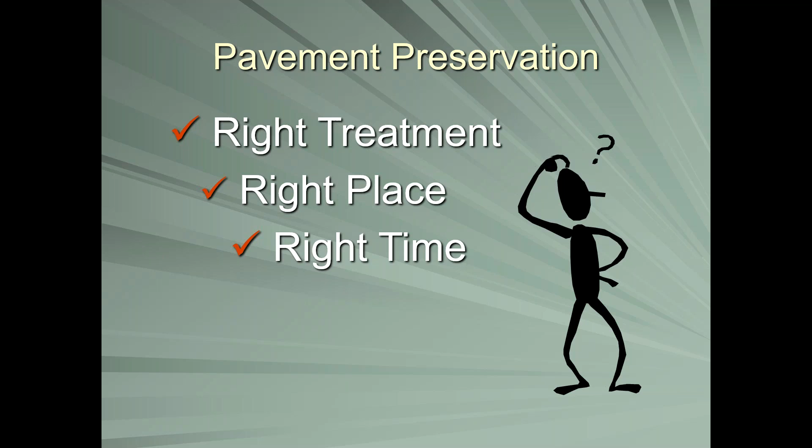Now the National Center for Pavement Preservation, out of Michigan State, likes to define pavement preservation as the right treatment in the right place at the right time. You could also use this definition for asset management, or for lots of things. And it's really true. It's not just about preserving the pavement with minor repairs—it's really all of the repairs we do, everything from doing nothing all the way down to total reconstruction.

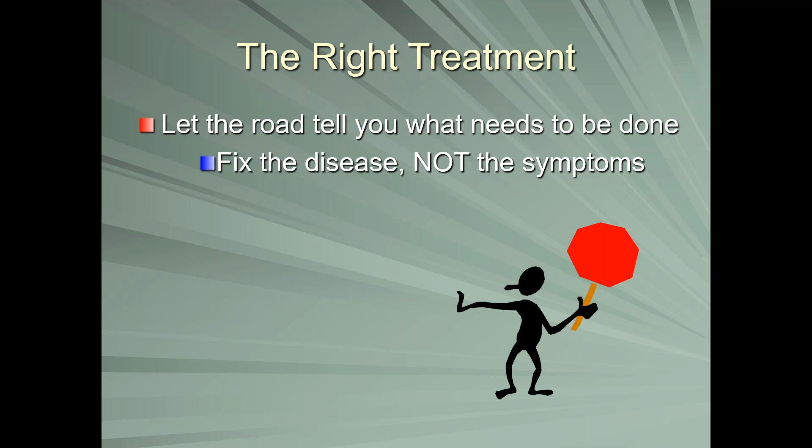The idea is to not just pick a repair because we can afford it or because it's expedient, but to choose the right treatment, to let the road tell you what needs to be done. Fix the disease, don't fix the symptoms, don't cover them up, because if you cover them up, they're going to come right back. For instance, here's a classic example of a roadway crack.

Looks like it's a load-induced crack, and if you went in there and tried to crack-repair it, it's not going to work. The crack is too wide, and you've got to figure out where the crack came from in the first place. Yes, it's in the wheel path, but if you look carefully, it's wandering, and it turns out they've tried to crack-repair it, and it doesn't last. This is actually a frost-heaving kind of crack. So we need to make sure we understand that and do the right repair. In this case, they need to fix the drainage on the upstream side. And we'll see if my pen works today.

Yep, they need to fix the drainage over here to keep the water from coming in from the side. Otherwise, they're going to have problems.

Here's another one. I got a phone call, went out to visit a town, and they were going to put an overlay on this road because they had a state grant to help pay for it. This is the highway garage right there. Much like in Ohio, where county highway officials are elected, here our town highway officials are elected, and that was an election year. That would have gone over really well when it failed in just a few months because of the drainage underneath. You can't just overlay this, it's too late.

So what we're going to do is have a little bit of fun, and do a pavement preservation quiz or game show, whatever you want to call it, and talk about different things in the list of repairs, focusing on the preservation side, but all of these things sort of overlap a little bit, as you'll see.

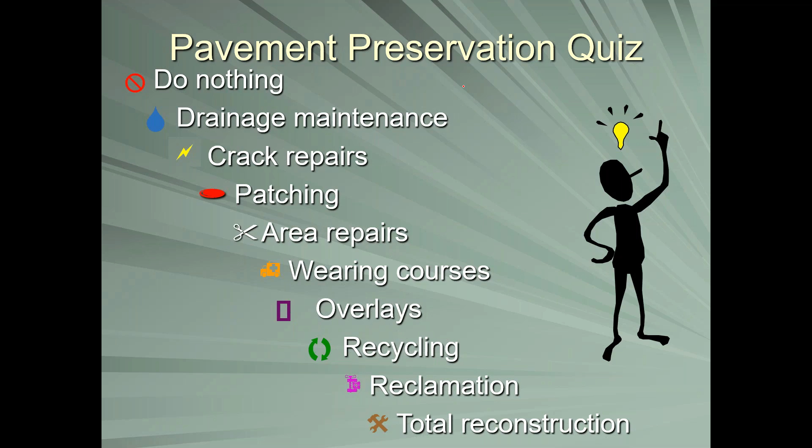If you're clicking 4 or more, I hope you're doing good social distancing. Or maybe you're at home with your dog, your 2 kids, and the parakeet, and you counted that as 4 or more. That's okay too. I hadn't thought about that. Somebody I saw was posting on Facebook their coworkers, and it was their 2 dogs.

Well, you got 88% there. So, can you see the results, David? I can actually. Good, most of you are by yourself. A few of you have 2 or 3, and then about 20% of you 4 or more. Again, please practice social distancing, we all want to be safe.

Okay, the next question that will help me quite a bit is who do you work for? So local government, state, a consulting or engineering firm, a contractor, or other. And of course, I'm always asking about people working for the weekend.

Okay, we got almost 90% there, Victoria. So over half of you work for a local government, that's good. A bunch work for the state, a few folks for consultants and contractors, and a few folks are working for the weekend, though I'm having a harder time figuring out which days of the weekend. But those are the days I don't wear a bow tie, I guess that's the way we can define it.

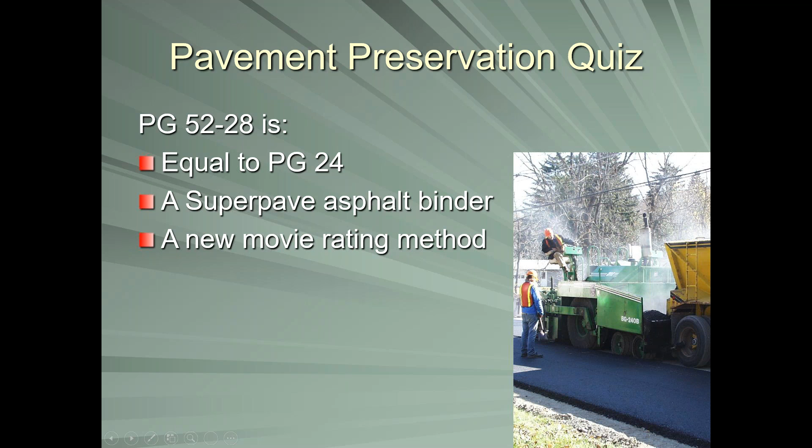Can you see the picture again, Victoria? Yes, perfect. So Superpave, as soon as my computer goes to the next screen, is the way we put asphalt together now. It's actually a whole method, not just the emulsion that holds it together and the binder, but the actual method of making the mix design up. And so SuperPave is what we use these days for that.

And PG graded binders are essentially performance graded. There's lots of big, long research papers on what all this SuperPave is, but essentially what they did is said, hey, what makes good asphalt mixes? We got these new polymers, let's blend the two together and come up with this new procedure called SuperPave. I like the description a guy who used to teach our asphalt paving class gave: he called it mighty good pave, and I think that's a pretty good way to think about it.

And it's based upon climate, because climate, we know, makes a big difference. You're going to certainly need to have an asphalt that can handle cold weather more in northern tier states than you would in southern tier states, but also traffic, because as traffic drives down the road, it heats it up. And you got to be careful it doesn't get too soft or bleed on you.

So the idea is, in the case of a PG 52-28, it's the range of temperatures. The 52 is the highest temperature in Celsius, not Fahrenheit, that the pavement temperature is expected to reach. Minus 28 would be the lowest pavement temperature is expected to reach. Now, yes, there's issues of how long that period is. We're talking about a full week for the 52 and just a short period of time for the minus 28.

What you need to know is what works in your area, so check with your own state specs and pick that out. And most of these mixes these days usually have letters at the end of it, P's and H's, for different kinds of additives or different characteristics they've been adding to it. Just like getting a 2-liter bottle, you don't need to necessarily know exactly what 2 liters is. You just need to understand what works in your particular area and make sure you understand and use the right material at the right time, okay?

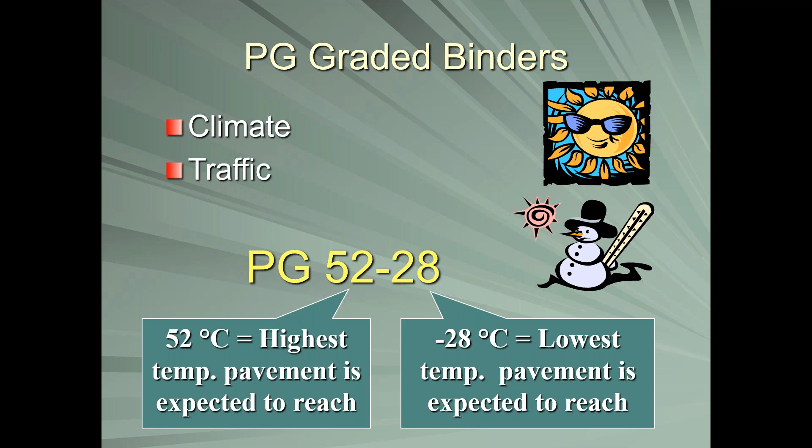Next question: the percentage of asphalt in asphalt concrete is 0 to 3%, 3 to 8%, or 8 to 12%. So if you bring up that poll, please.

I did notice on the last poll question that when I hit to hide the responses at the end, it looked like it went back to your screen. Oh, we'll try that. Be brave. Yeah, I'll watch for a second and I'll let you know. Okay, almost there, Victoria. We got our 80%. Okay, so 4% said 0 to 3, 68% said 3 to 8, and 28% said 8 to 12%. Okay, so I'll let you try hiding that. And? I shouldn't have said it because it didn't work. That's okay, sorry, no big deal. Life is about change, it's no big deal.

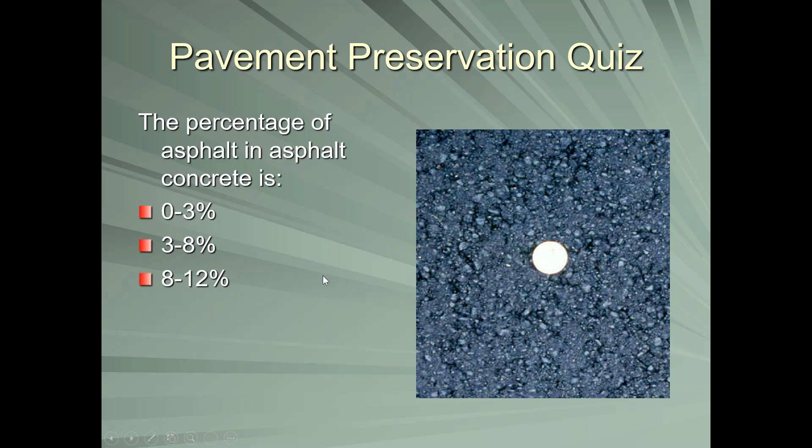Okay, so the answer actually is for almost all mixes. There are some exceptions, of course, but for most mixes, the actual answer is 3 to 8%. It's not that much binder. If you have too much binder, you're actually going to have a problem, it's going to be almost too soft, okay? And that can actually be a problem if you put too much asphalt into the mix. It actually doesn't take that much.

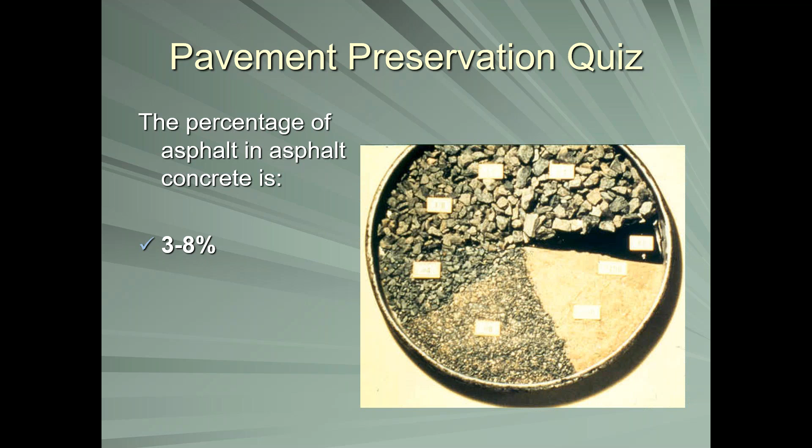Are there some mixes a little bit higher? There's some rare mixes, but most mixes we want to keep it relatively low. Whether it's cold mix or a hot mix or the more modern warm mix, the amount of asphalt is actually less than most people think, okay? Remember, you're not driving on asphalt, you're driving on rocks. It's the rocks that actually do the work. The binder is just there to hold everything together, okay?

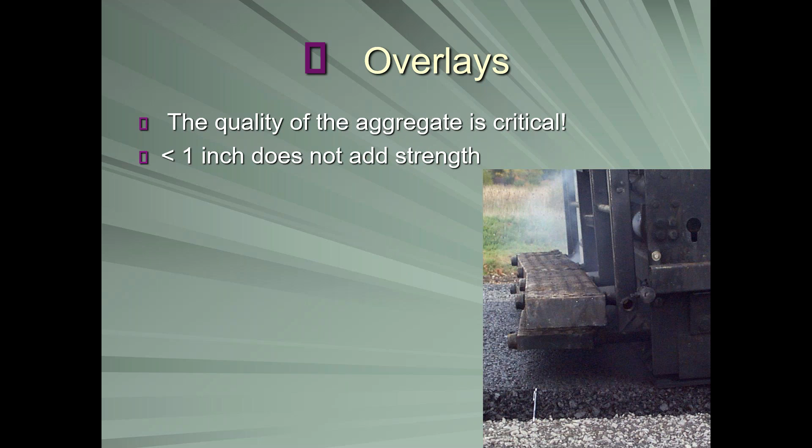So keep that in mind when you're thinking about an overlay, okay? The quality of the aggregate is critical, in fact it's the single most important thing. And if you're not putting enough thickness down, you're not really gaining much strength. So if you're just putting down a thin overlay, you're just doing a wearing course or a chip seal equivalent. You really need an inch or more, and I prefer 1.5 inches or 2 inches to really add structural strength, okay? So keep that in mind when you're thinking about your choices for repairs.

Okay, next question: recycling fixes the base. It's just a simple true or false. Recycling fixes the base. And here comes the poll. True or false?

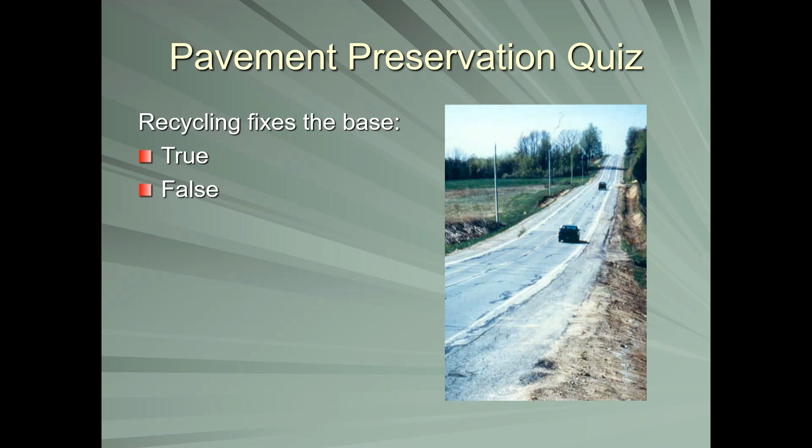Okay, they're seeing the results. 90% of you said it does not fix the base. So try hiding it and we'll see what happens, Victoria. Nope, nope. We jinxed ourselves, it's no big deal. So the answer is, as you got right, it doesn't really fix the base.

When you see the term recycling, what we're really doing is addressing a relatively thin amount of material, usually the asphalt layer, sometimes not even the entire asphalt layer on a main line roadway that's got a lot of asphalt thickness. We're only talking 6 to 8 inches at the upper end, so we're really not doing a lot with most recycling operations.

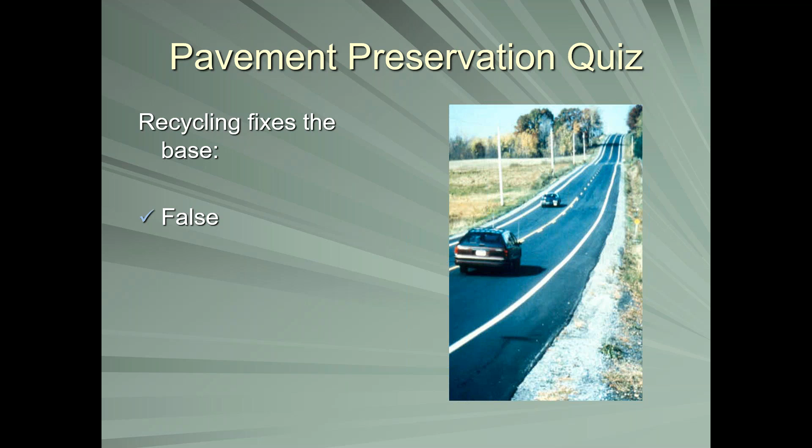If we want to do something more extensive, we have to go to stabilization, like full depth reclamation with different additives, and we'll talk more about that with another question. But just keep in mind, when you hear the term recycling, we're really talking about fixing the surface. And if there's drainage problems underneath, or a base problem, it's still going to be an issue.

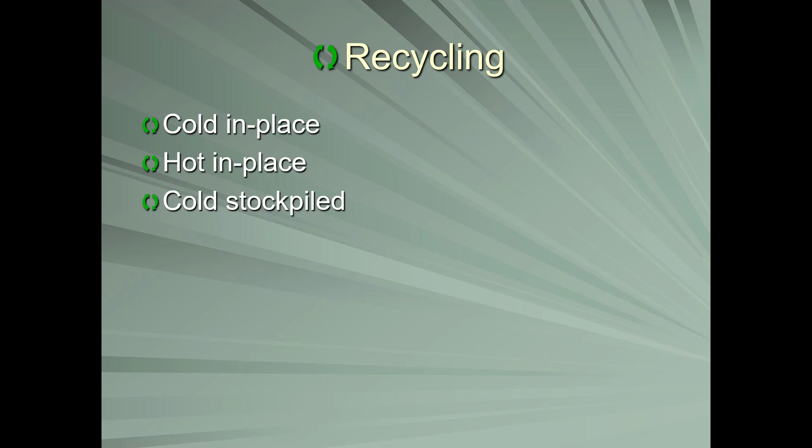The key with that technique is you've got to go slow. People want to go fast, but you can only put so much heat into the asphalt to soften it enough to scarify and roll it. If the smoke coming off is anything but a light gray, i.e. blue, you're burning the asphalt and damaging the pavement more than you'd want, and you're going to have to add back material. The whole point of recycling is to not have to add back in too much material.

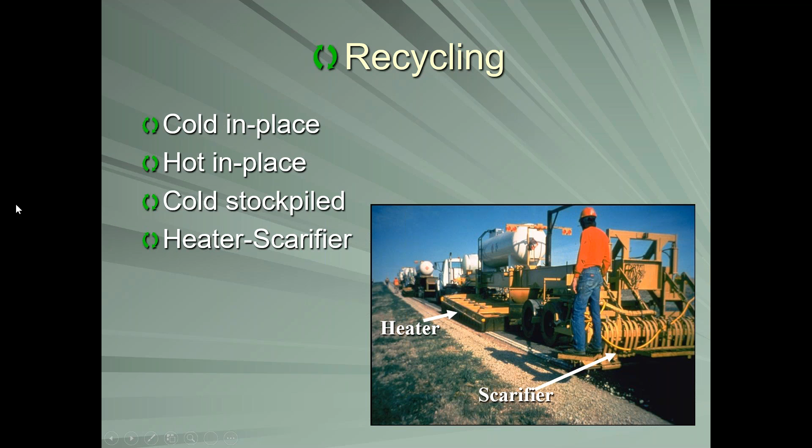Okay, next question. Pavement preservation time. Doing nothing is a good maintenance technique. True or false?

Okay, almost everybody says doing nothing is a bad maintenance technique. Let's try hiding it. Of course, it's probably going to have to redo the screen, isn't it? Yep.

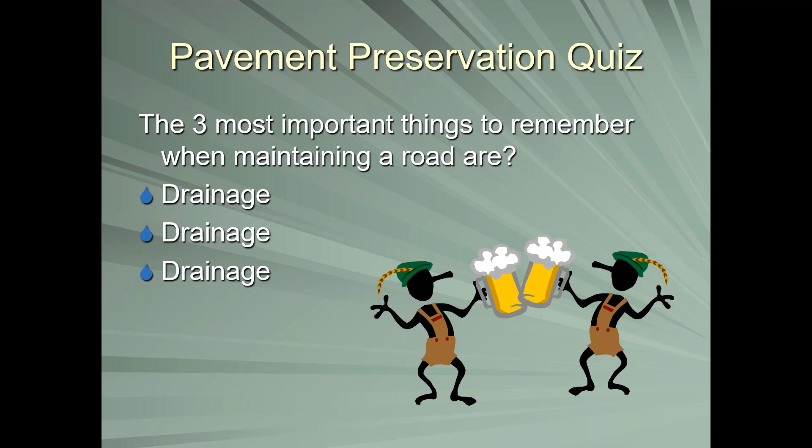People got it. Drainage, drainage, and drainage. If you take care of the drainage, most of your problems go away. In fact, almost all the premature failures we get are because we didn't handle the drainage. A lot of times when we talk to the public and elected officials, they think poor drainage means a culvert that's too small. But drainage, if you think about it, includes crack repairs, poor bases, everything in our roadway. We've got to have good drainage, and I'll show you more examples as we play with the quiz. But the single most important thing is drainage by far, so keep that in mind.

Okay, calcium chloride stabilization. I said I'd talk to you a little more about stabilization. So calcium chloride stabilization reduces the fines percentage in the base we're stabilizing, reduces the frost susceptibility of that base material, or reduces both the fines content percentage and the frost susceptibility.

So we'll do a poll and see what y'all think. I had to combine your last option because it was too long for the polling software. Okay, no problem. So if you don't remember, 'reducing both of the above' is an option. And we're not tracking your answers, so just vote your gut.

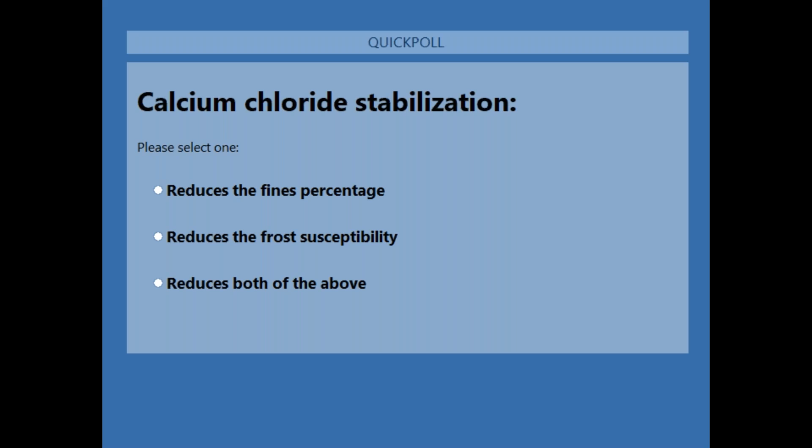Okay, so two-thirds of you say it reduces both. About a third say it reduces the frost susceptibility, and a few say it reduces the fines percentage. After you hide that, I'll flip the screen on and off real quick. You're good to go.

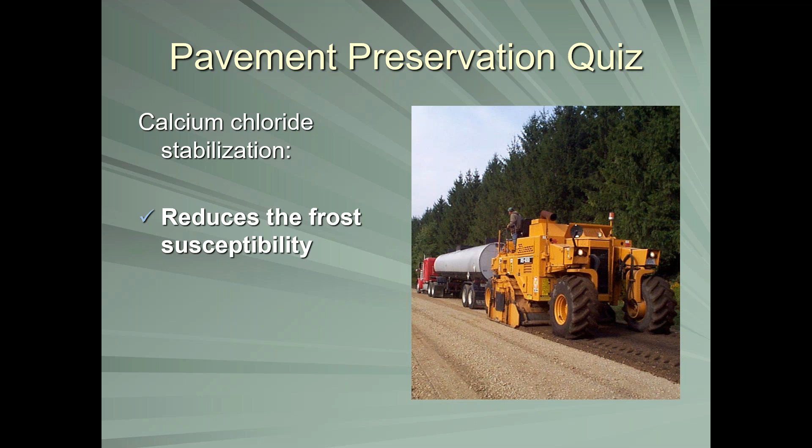So the answer is it reduces the frost susceptibility. It does not change the fines content. It's a salt. Now there are times when you'll see people say, well, we don't use salt—I've seen that advertised, especially in some western states. We don't use salt in the winter, we use calcium or magnesium chloride. Got a trick for you: they're still salts. If we're doing stabilization, there are actually lots of different ways we can do it.

We can use asphalt as well in stabilization, but the two I want to talk about right now are mechanical and chemical. Mechanical stabilization is a fancy term for either over-densifying or bringing in aggregate to reduce the fines by blending clean material with dirty material, so the average has less fines in it. Remember, if we reduce the fines, we have better quality for drainage.

Chemical stabilization can include calcium, asphalt, lime, fly ash, and cement, but they all do slightly different things. The asphalt emulsion doesn't lock everything together—it just takes some of the fines and binds them up so they aren't affected by water. Lime, fly ash, and cement can actually cement things together if you have the right chemical makeup. But if you add too much, you can have a problem with cracking, especially shrinkage.

And then finally the salts—calcium, magnesium, and in some cases sodium chloride—are used to chemically stabilize. What they're really doing is reducing the frost susceptibility, much like when you make ice cream, you lower the freezing point, reducing the negative effects during freezing and thawing. You don't eliminate it, and you still have a high fines content, but keep in mind they have different purposes for different operations. Do me a favor: when you calculate what you need, don't add extra. People want to do that—'if 5% is good, 8% would be better.' If you add too much, you can create problems: making it soft, making it crack, and having negative effects from having too much.

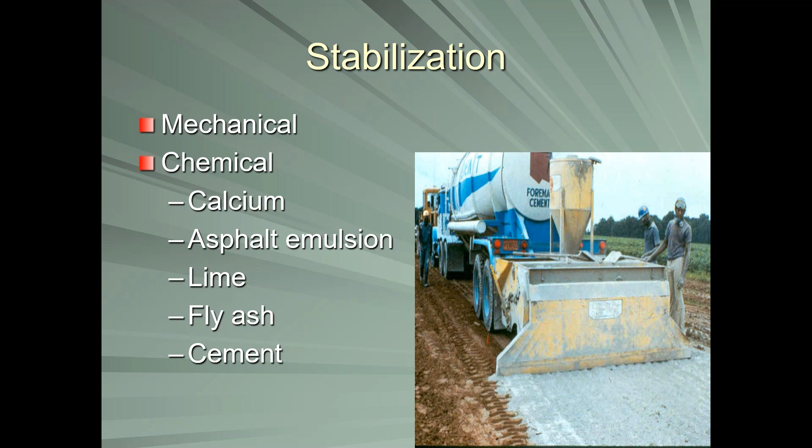So we'll do a poll. I think this one should be easy after the last two, Victoria. I would hope. Someone has a sense of humor. Well, it's got to have a little bit of fun—we can't be totally serious.

Okay, almost to 80%. Okay, so we're going to show the results. Yeah, you're right, that's a pretty easy one. Only a couple of you decided it wasn't the supervisor and OSHA inspector. Okay, go ahead and hide that, Victoria.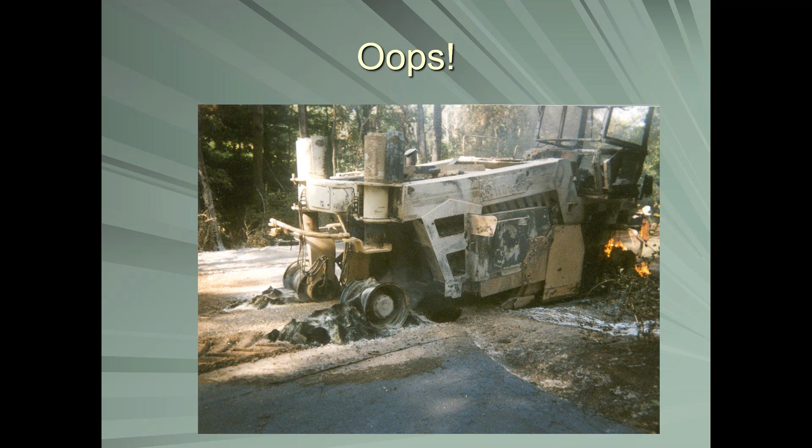Next question: sealing is used for cracks that are non-working. True or false? You can bring that one up.

Mailbox post, by the way, yes, you should call for mailbox post.

Okay, sealing is just used... it's fascinating to see all the answers from people all around the country. That's why we like doing it. I like these multi-state ones. It's sort of fun to see.

Only if you break the plane for the last one. You don't mow the road surface. Yeah, it's always an interesting question: when should you call?

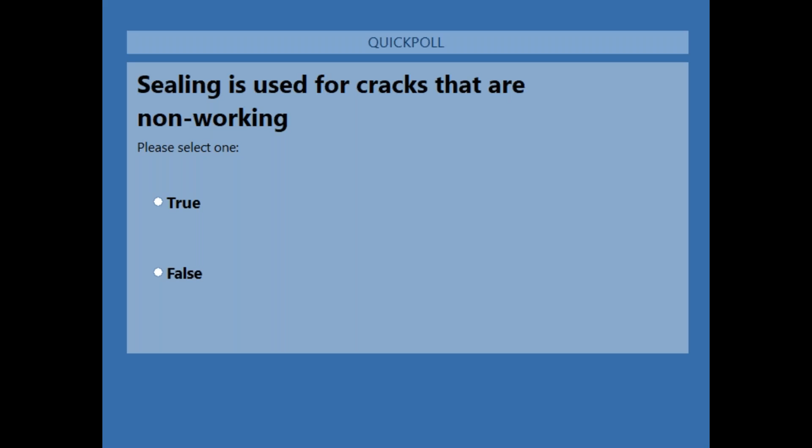Okay, so let's go back and we'll see if it keeps me going here. You're going to hide it? It didn't work this time. Oh my goodness, I just have to laugh. Chuckle at technology, yeah, you do. It's okay.

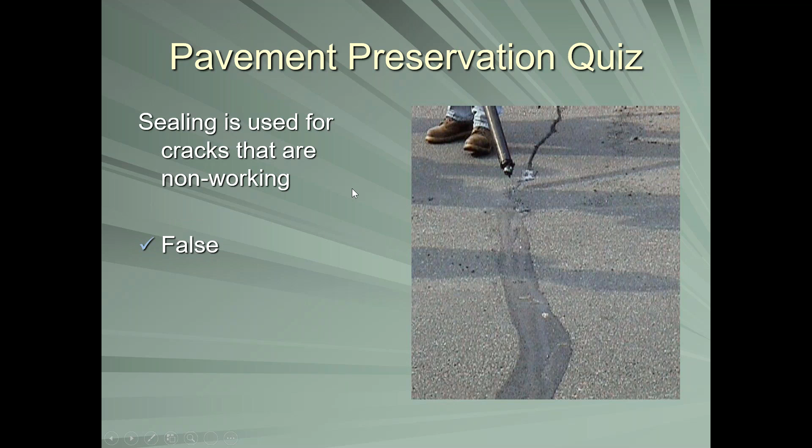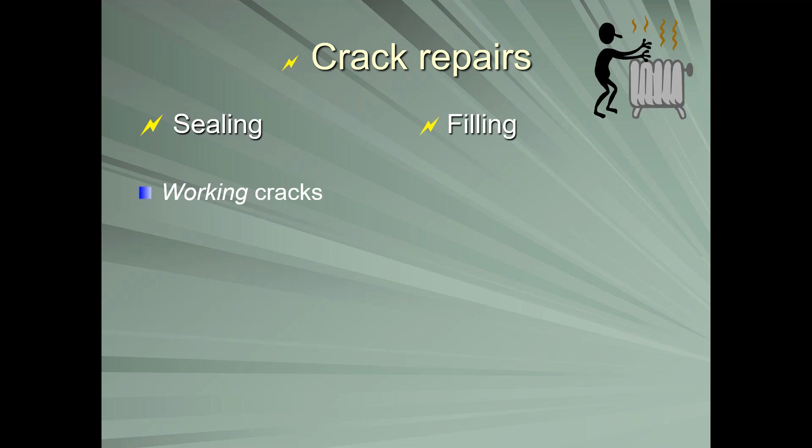So the answer is false. Now, I actually lumped together all crack repairs. There's two types of crack repairs: they fall in the category of sealing or they fall in the category of filling. A sealing of a crack is for working cracks, cracks that are moving, usually thermally. You need to seal them because you're trying to prevent the intrusion of water and debris into the crack. Because if it's a moving crack and you don't seal it, when it gets filled up, as it moves it's going to actually compress and do more damage.

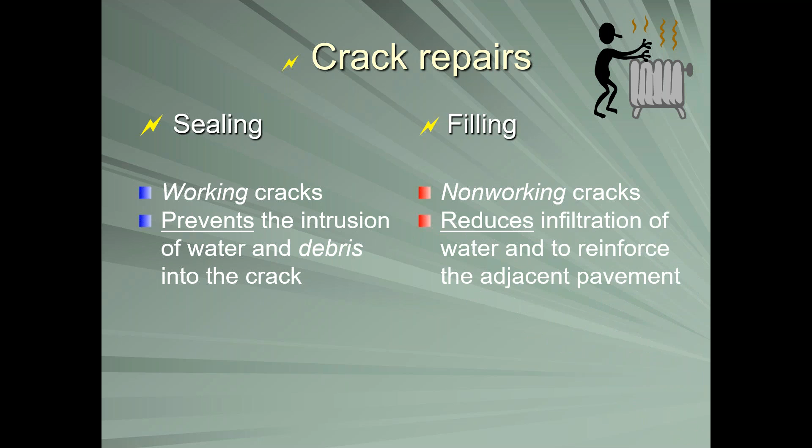With filling, that would be only used for non-working cracks because you're not actually going to seal everything. You're just going to reduce the infiltration of water and try to reinforce a little bit the edge of the pavement. And there's tons of techniques out there available to you, from flush filling to overband to reservoirs. But again, if it's a moving crack, it's worth it to spend the extra money on the more expensive sealing materials, the rubberized materials, the elastomeric kind of materials, versus if it's just a crack that's cracked because of age, you could fill it with an asphalt emulsion and it would be fine.

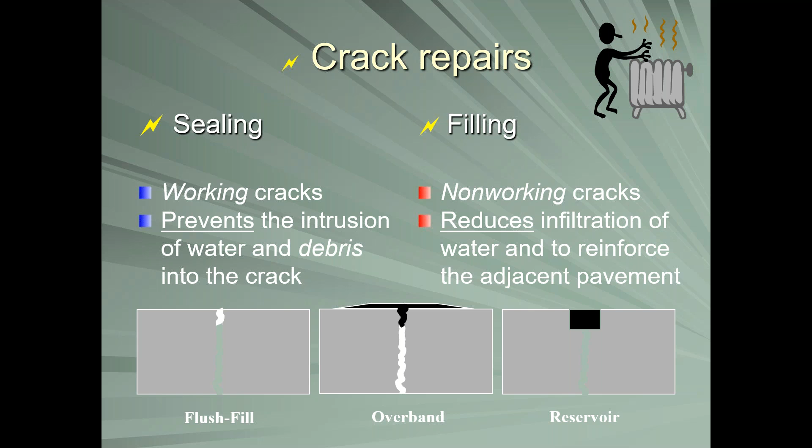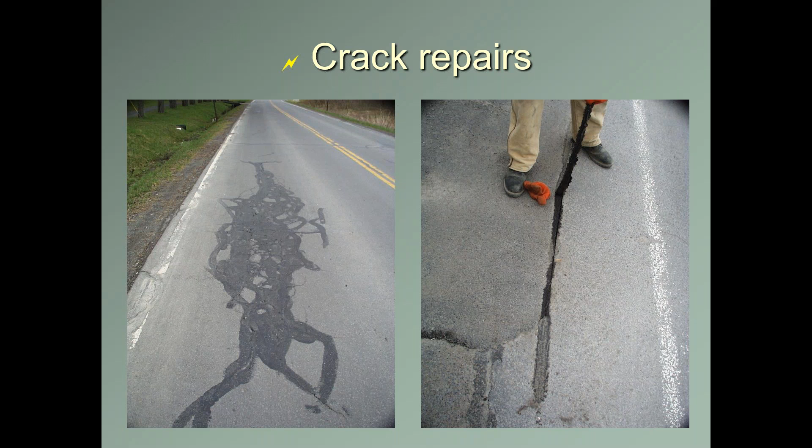If you're going to do a router, are you going to do any sealing? Make sure you clean the crack. I actually prefer a heat lance to really get it nice and dry. So that's very important to keep in mind.

So pick good candidates. Remember earlier I said doing nothing is a good repair choice? It would be a lot better repair choice here to do nothing than to waste the money on this kind of crack repair. If you're paying somebody by the gallon, however, and you don't have good inspection, this is what you might get.

Next question: the most cost-effective patching technique is throw and go, throw and roll, semi-permanent, or spray patch. Okay, you can bring that up.

And you have a comment in the question box. Let's get this poll question done, and then I'll go back to the comment.

I like the split on this question, the answers we're getting. Well, that's okay.

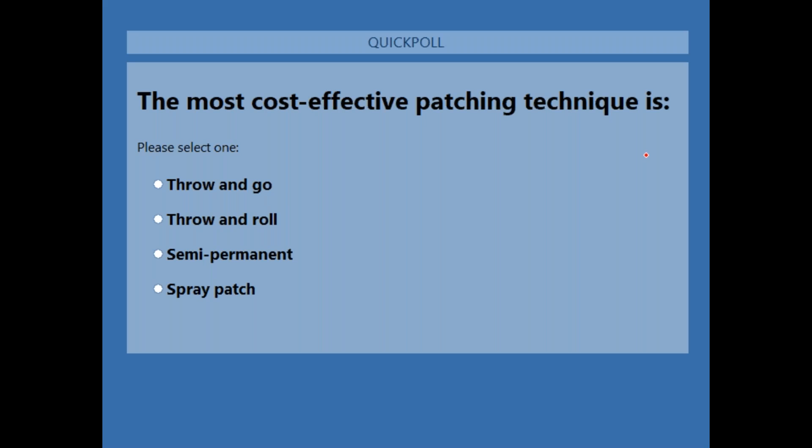Okay, so the answer is, what do you think? Well, good news is for all of you except for one choice, you've been right. It depends on the situation, as the comment says, depends on the material to some extent. Yeah, absolutely, it depends upon conditions. In the winter, when the plants are closed, a throw and roll is actually very cost effective if you do it right. Semi-permanent can also be very cost effective if you do it right, and if you have spray patch equipment available, also very cost effective. It turns out they've studied this, and you can run the math yourself. All three of them are actually pretty close in terms of price if you do them right.

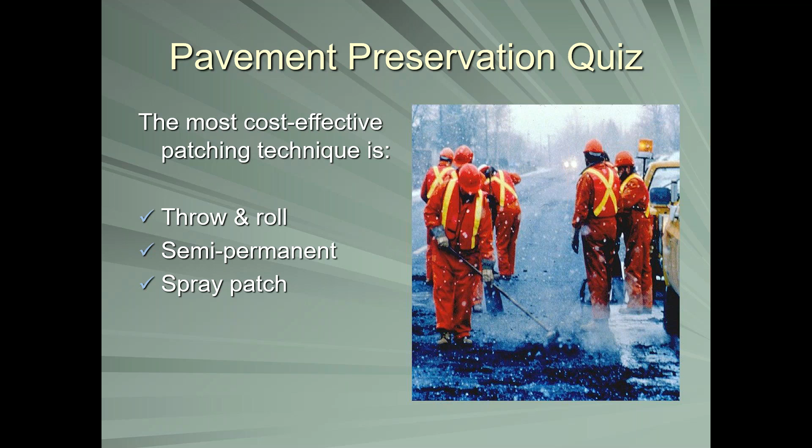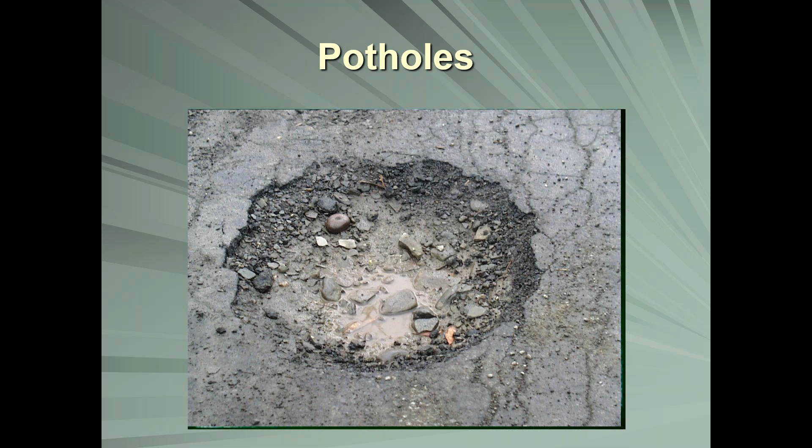Throw and go, where you just pop it in the hole and drive away, that doesn't last at all, because the bane of our existence is potholes. Now, we want to make sure potholes are filled in. Even now, during our crisis period, it's a critical activity. We got to keep the potholes filled. Now, have a little bit of humor with it, but it's a serious situation, and obviously it can be a safety issue as well.

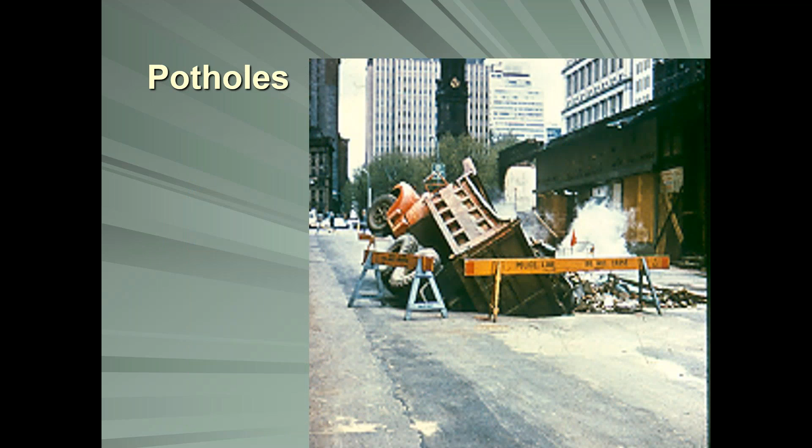Now, in terms of patching, there's cold mix with throw and roll, where you roll it with your truck. There's hot with semi-permanent, and spray patching, though the spray patch is sort of in the middle. It's an emulsion that's heated up, so it could maybe even be considered warm.

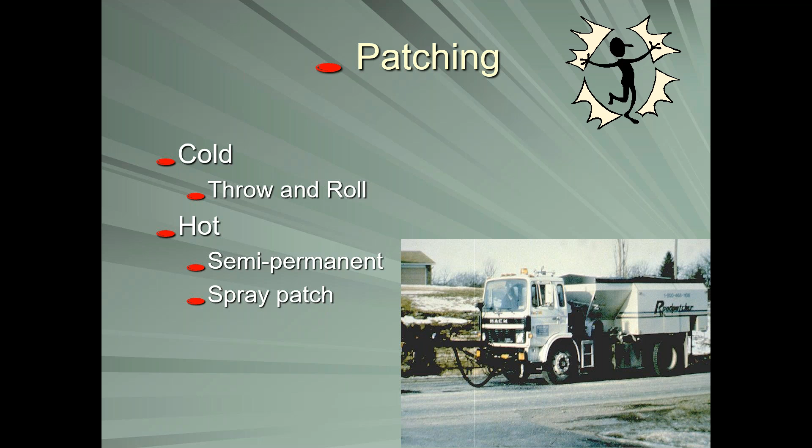Okay, but do me a favor, when you're going to do patching, do it right. We don't want to have that famous motto on the side of your truck: we do it nice because we do it twice. Or in this case, three times. I got to watch them fill this. Three different agencies actually tried to fill this little slot. All three of them did it the same way. They threw some material in the hole and they walked away, and it didn't last.

Put it in the hole if in the winter you have to go out and patch. Use a polymer mix and roll over it with your truck tire. It really does make a difference. You can get 80 to 90% of your patches to last through the spring, even here in the north, if you do it right the first time. But when the weather conditions warm up, think about semi-permanent and doing something that's going to have a little bit longer life to it.

Now, before I move on to the next question, somebody had said on that last one, with all the cracks, that it might be a candidate for something called a scrub seal. And a scrub seal is actually a pretty cool technique. It's a form of a wearing course where you actually scrub essentially the emulsion in with a broom to help it penetrate, and it works pretty well on roads of low to moderate volume. We don't have a lot of trucks and a lot of movement. So you want to make sure you don't have a really poor base underneath, because obviously, just like recycling, you're only going to be doing some work on the surface. And because it's already broken up almost, it's only really going to keep the surface alive. If you've got a lot of movement, scrub seals are not going to necessarily solve the problem, but they are a good candidate. We should add them into our toolkit.

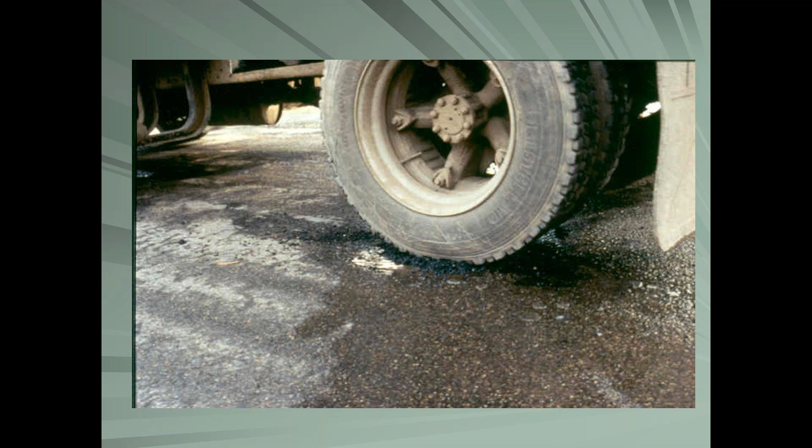Okay, next question on our list. All wearing courses, speaking of surface treatments, can waterproof the pavement, restore skid resistance, restore the oxidized surface, and true and level minor ruts. So Victoria's going to bring up the poll.

You can actually check on more than one. So, oh my gosh, I closed it accidentally. I'm so sorry, closed it. Oh no, anybody go back voted? Can't. You're just gonna have to tell them the answers, David. I'm sorry. Well, why don't you hide it? Let me do that. I have to do the share and hide real quick. So you guys are all off the hook on this one, but your slide came back up.

Well, that's good. It's okay, it's technology. I'll just make a Buckeye joke at your expense at some point.

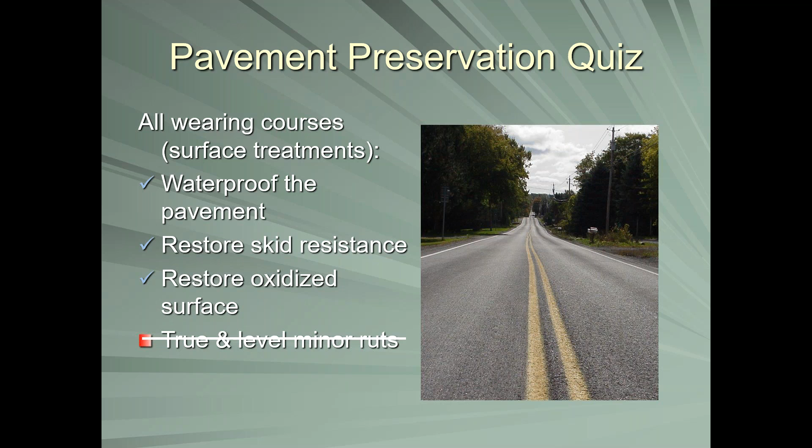Thanks, David. So the answer is, all wearing courses will waterproof the pavement, all wearing courses will restore the skid resistance, and all wearing courses will restore the oxidized surface. That's their primary purpose.

But when you hear people say, oh, I can fill minor ruts, some wearing courses will. Chip seals, no. Slurry seals, no. But NovaChip and MicroPave will. Micropaving, where they add a polymer essentially to a slurry seal, was designed originally to fill ruts on the German Autobahn. It actually can fill minor ruts, but we're talking minor, okay? We're not talking big ruts.

And a lot of people think you can fill a rut with a thin hot mix overlay. The problem with trying to do that is when you roll it, it'll tend to push back into the rut, and the rut really comes right back. So it's something you have to keep in mind.

And the comment about moving ruts - if you got a moving rut, you got to be real careful with your wearing course, because all it's going to do is move along with it. So you need to have a stable platform. The rut needs to be because of age and time, more than an unstable mix. Because if it's moving, it doesn't matter what you put down.

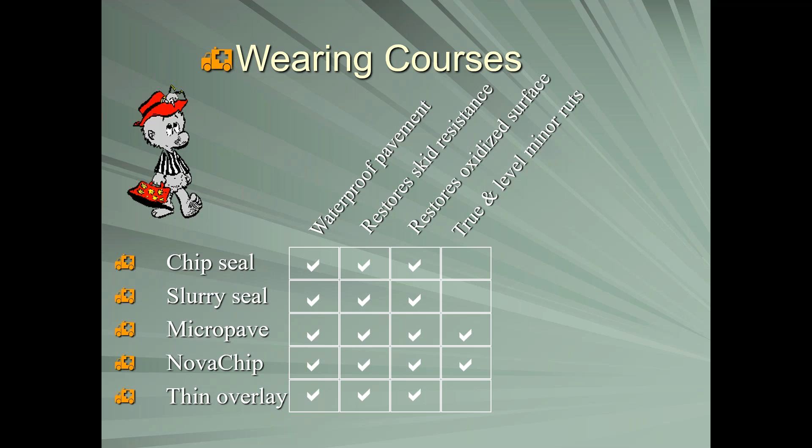There's a picture of a micropaving. It looks a lot like a slurry, because that's what it is - just a different chemical composition, some polymers to help fill in the ruts. But if the ruts are deep enough, you're going to actually want to do two passes: a rut pass and then the final pass. Here's a NovaChip.

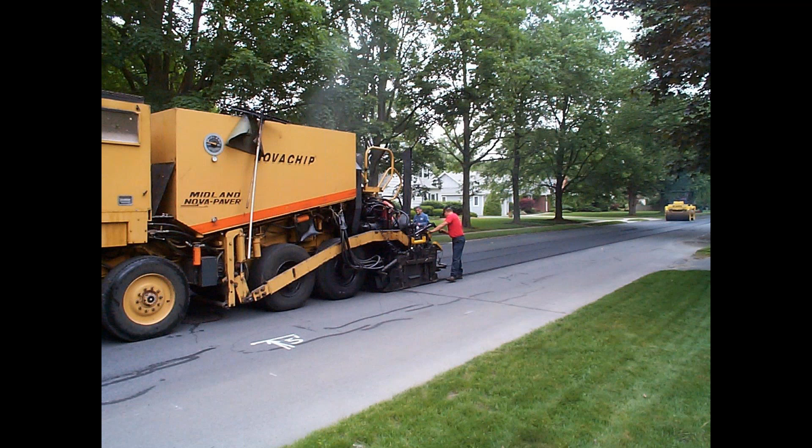And in the case of this NovaChip, the thing I like about this particular photograph is you can actually see they had done the crack repairs beforehand. In fact, if you're going to do crack repairs, try to give them a season to cure out. Don't just put them down and come back a week later, because you can actually have problems as the crack repairs are still trying to cure out.

And yes, you could try to true and level first with the overlay, but then it's not just a thin overlay - you're actually doing a true and leveling course first to fill in the ruts. And when you do that, roll it with a rubber tired roller, not a steel drum, because if you use a steel drum roller, you can bridge over it and not get the density you want in the rut filling operations.

So here's what one looks like when you're done. They look fine. I like wearing courses, I think we need to do.

Is micropave the same as microsurface? Yeah, there's just different terms. Here in New York State, for instance, we don't actually call it NovaChip, even though that's the brand name. In our spec, it's called paver placed surface treatment, which actually in some respects is a good way to think about it.

Pavement preservation - the emulsion is brown before it breaks, and it's a bad photograph because the stone is brown.

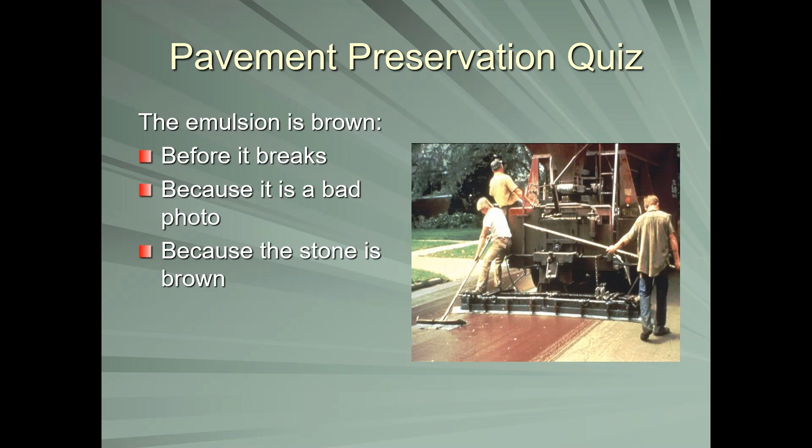Okay, so the answer is it's brown because that's the color of an emulsion before it breaks. An emulsion is essentially a mixture of water and oil. When you think about it, it's like mayonnaise or salad dressing - it's a mixture, and because of the way light works through it, it looks brown.

Okay, here's the thing about emulsions. When you're putting an emulsion down, especially for wearing courses, if you try to put down rocks on top of an emulsion that's already broken, it's not going to stick. You really want to get the stones down before it turns black.

In other words, if it's brown, put them down. If it's black, you're going to have to send it back.

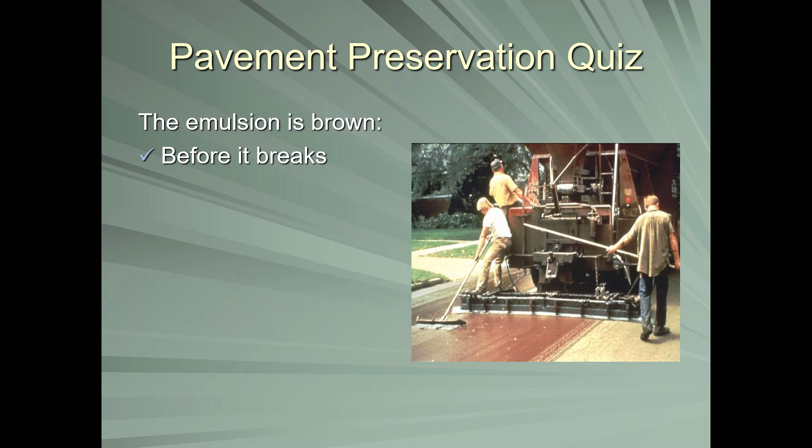I have a picture that I got sent to me. It was in a Federal Highway slide deck. It's a nice picture, and for years I've been using it - it's a beautiful picture of a chip seal spreader, and you can see the stones and all that. One day I got a copy of it that was in color, and I looked at it and thought, uh-oh, look at the color in that photograph. That's a nice, good black.

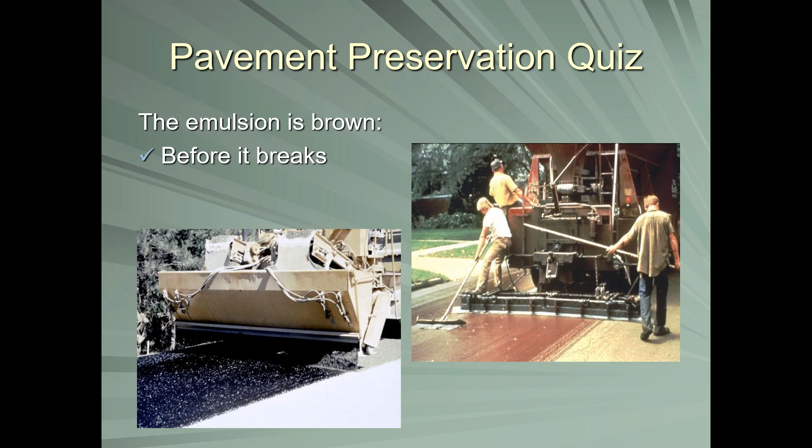If it's black, you're not going to get anywhere near the amount of sticking that you really want to have. You could roll it till the cows come home and you're going to lose too much stone. You got to get the stone down while it's brown. In the case of a chip seal, that means you need to have that spreader right up to the distributor truck. Don't let them get far away. Our old director, Lynne Irwin, always liked to say you want to tie a rope between the nose of the driver of the distributor and the nose of the guy driving the spreader so they don't get too far apart.

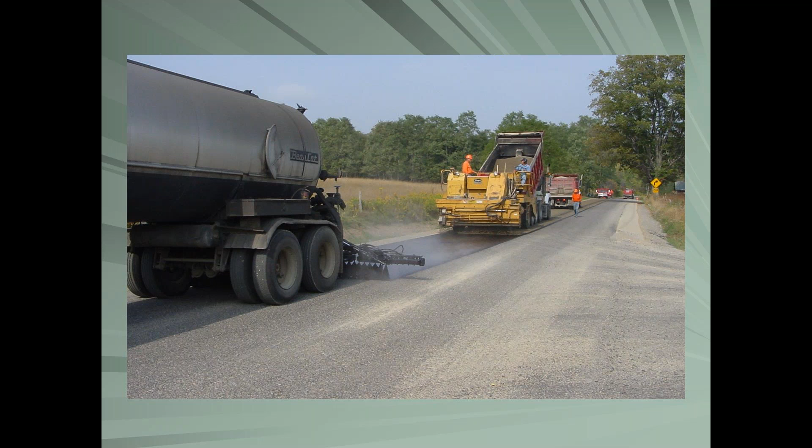Okay, next question. Which is not a cause of pavement distress? Traffic, temperature, moisture, age, and possums.

Okay, yeah, I know it's an easy one, but what the heck, let's have a little fun, if you're awake. Now, David, I almost took issue with the way you spelled possums - I tend to feel there ought to be an O in front of it, opossums. Well, I did grow up in the deep south, so we just call them possums. And they get pretty big. But they do around here too - they like cat food, by the way. My dad found that out the hard way. He had a couple of cats, and they love cat food.

I have to share this vote now. Here we go, go ahead. So 96% of you, whether it's a possum or an opossum, you're pretty happy with it. But a few of you voted for something else, so let's talk about that just a little bit. Go ahead and hide it and see what I have to push - you have to share one more time. Yeah, it's okay, because I think that's the last quiz question.

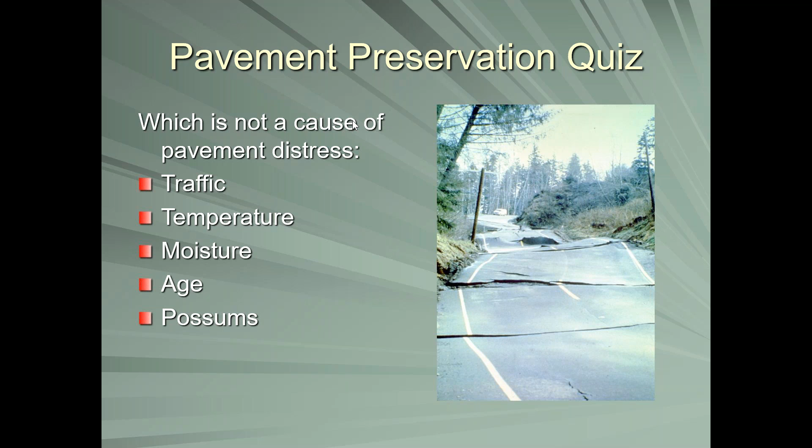So the answer is, of course, as we'd expect, everything can cause pavement distress, except possums, with a couple of exceptions - sometimes critters can climb in underneath and actually damage the roadway. We actually had some woodchucks that did enough tunneling underneath one of our roads that it actually had some settlement when I worked for a county. So normally we wouldn't expect possums to be a primary issue, but do me a favor - when you're looking at your roadway, get the possums out of the way, okay?

This is a famous picture from Alaska of the Not My Job Award. The idea at the end of the day is just about everything makes a difference. Traffic, obviously, because the more traffic, the more bending, the more damage. Temperature makes a difference as things get hot and cold, especially when it gets really cold, asphalt can actually crack. In the hot part of the summer, it can rut just because of temperature, especially with asphalts. Moisture - as we said earlier, drainage is one of the only things that really matters. And of course, age - older pavements tend to be near the end of their life, and over time all pavements deteriorate.

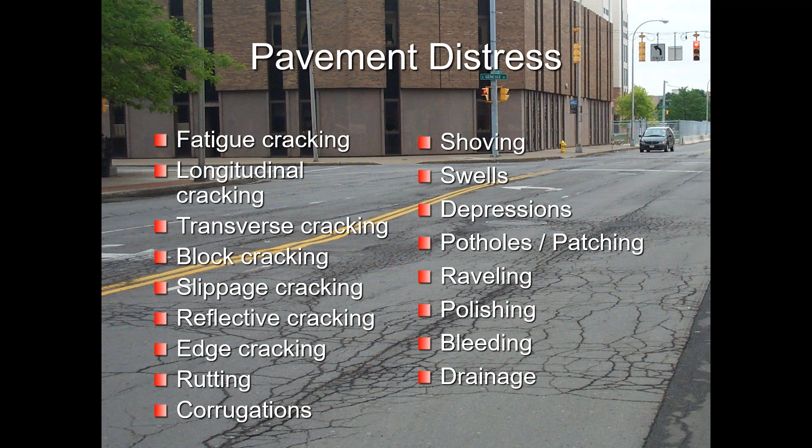No, I'm not going to repeat that comment, but it's a good one. So just remember this as you're looking at your pavement. Pavement distress - there's tons of it. There's fatigue cracking, block cracking, all kinds of cracking that goes on. There's rutting, corrugations, depressions, potholes. What causes them? Think about it - it's those 4 factors. And they're all exacerbated by a lack of drainage and heavy trucks. But at the end of the day, do me a favor: fix the cause of the distress, not the effect.

So there's not a poll question for this, but I'm hoping you know the answer to it now. We'll see if somebody pops it into the box here. What is the best pavement preservation technique? We'll see if they come up with it here.

Plow, snow plow. In this case, yes, you would have to plow it.

But generally, what is the best overall for all pavement preservation? Drainage, improving drainage - I like that one. Doing nothing, it's easy and cheap. Yep, that's good. All of them. Yep, you need to have everything in your toolbox. There's some good. The right treatment at the right place at the right time. So you've got to make sure you have the right treatment in the right place at the right time.

You have to have a plan in place for asset management and for other activities. And you have to be able to adjust, as we're all having to do right now.

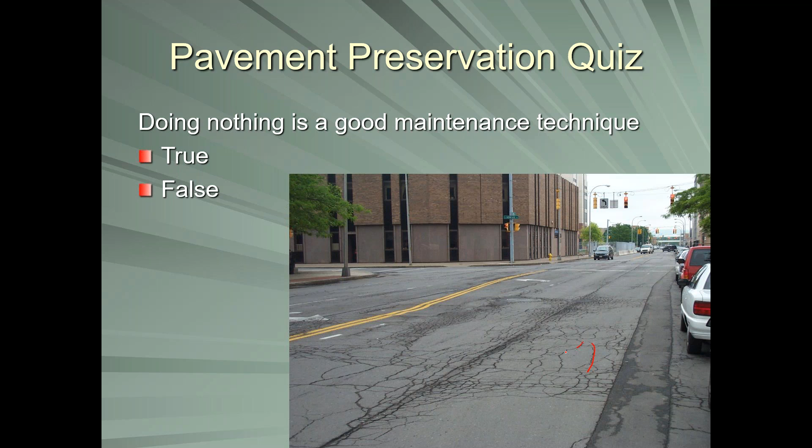Okay, if I try to draw in all these cracks, how much time and effort is that going to take? If you combine all of those together, would it be thicker than 1 inch wide? If it is, it's probably too late. So the general rule of thumb is at most 3 parallel cracks, and obviously here I have a lot more.

Larry popped in a really good idea there - go to roadresource.org, they have a whole bunch of pictures. The National Center for Pavement Preservation has them as well. So there's some really good stuff out there on when to do crack repair and when not to. There's also a very good SHRP document from the Federal Highway Administration available on when to do certain kinds of crack repairs. And in that book I mentioned earlier on pavement maintenance that we have on our website, we have stuff on that too.